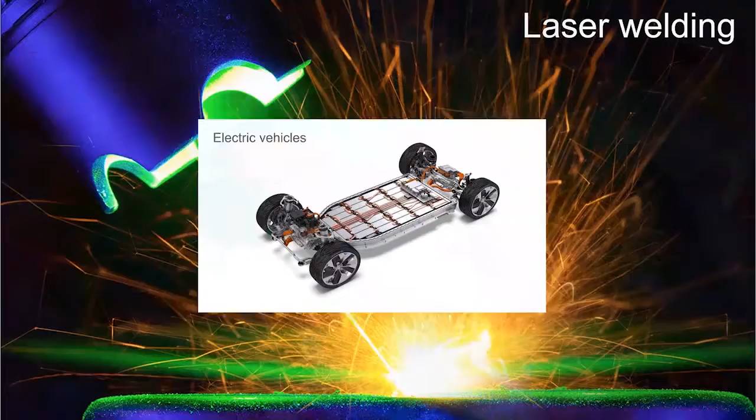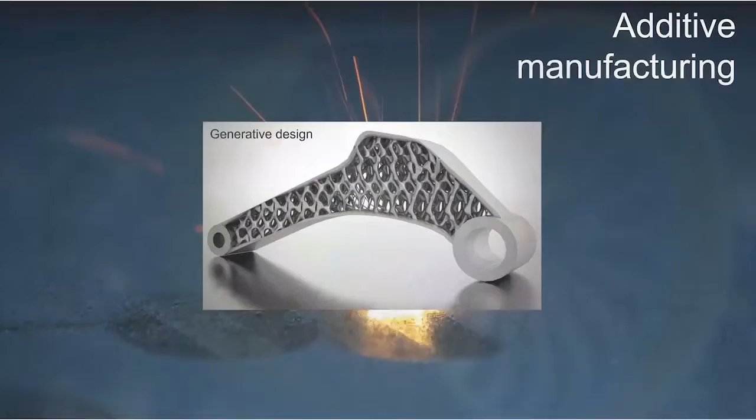Hi, my name is Rob Martinson, CTO at nLIGHT. On behalf of our global engineering team, it is with great pleasure that I introduce a remarkable breakthrough in laser technology. We call it Corona. Corona lifts one of the most fundamental limitations associated with lasers since their inception over 50 years ago: the ability to control a laser's brilliance with simplicity and speed from an all-fiber architecture.

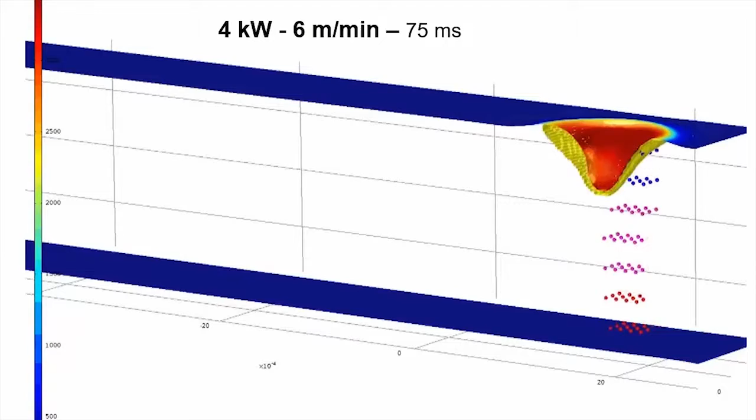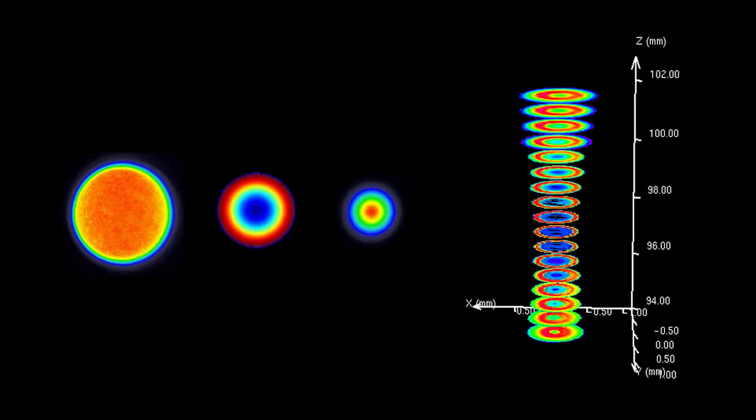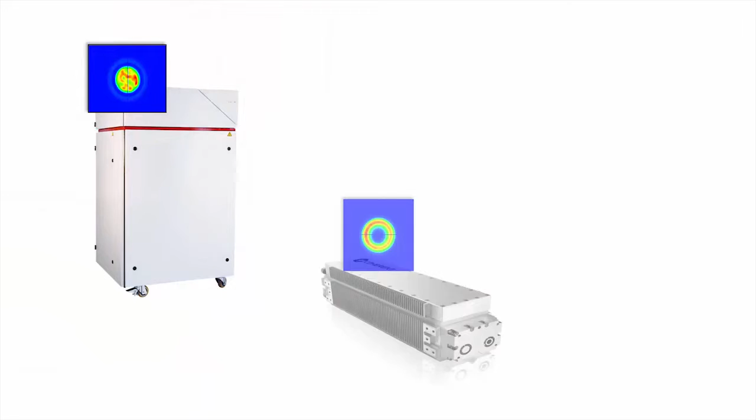Let me explain the significance of this. Choosing a laser for a particular application, whether it's for cutting, welding, or anything else, depends strongly on the beam characteristics. The size and shape of the spot, its rate of divergence, and its distribution of intensity are all very important. Changing the beam quality to address different applications required the purchase of multiple lasers or implementing very expensive accessories. These legacy approaches to variable beam quality introduce significant complexity and cost.

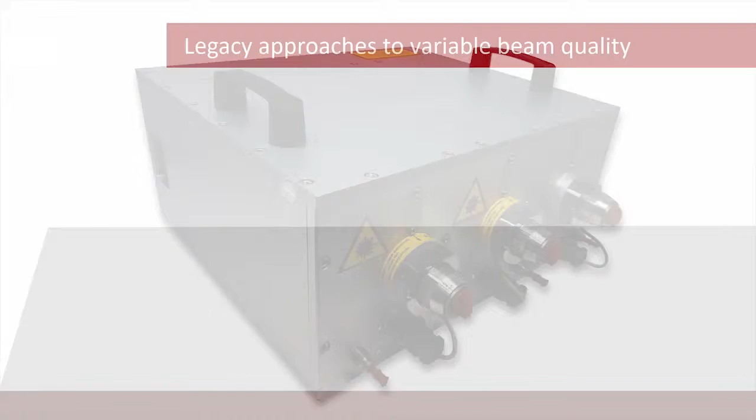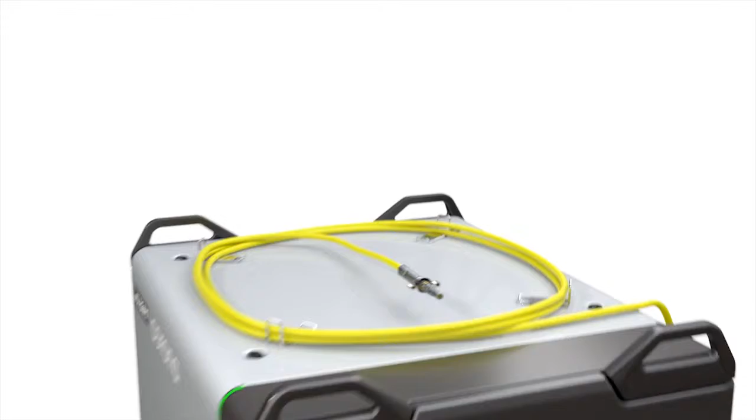In fact, we can identify numerous other issues responsible for limiting the acceptance of these legacy approaches to the industrial market. nLIGHT's new generation of industrial fiber lasers highlight the simplicity of Corona. Programmable brilliance from a single, small format fiber laser, enabling great versatility for machine tools and numerous degrees of freedom to dial in process recipes.

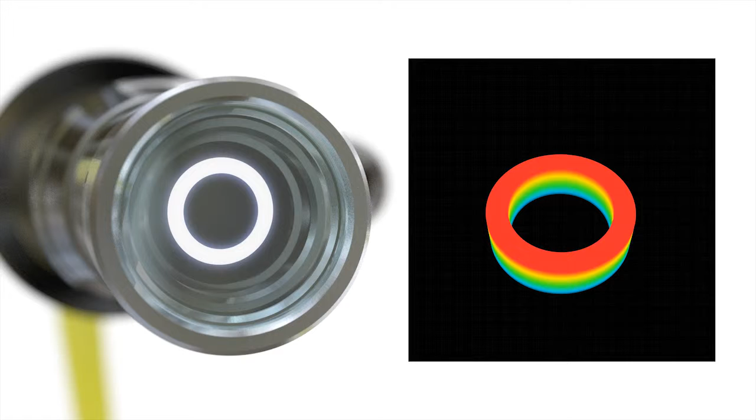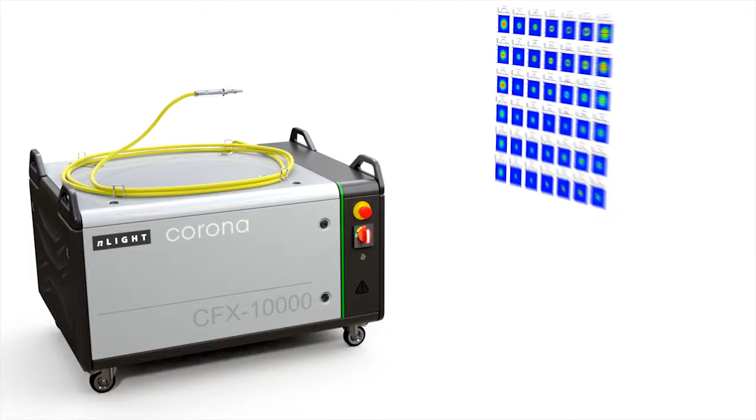Our customers are no longer limited to just a stationary beam profile. They can now switch between a broad palette of beam profiles and do it fast, meaning on the fly and in real time. And of course, implemented with elegant simplicity so it's easy to use and highly repeatable. Our customers can now be equipped with a powerful toolbox of spatially controlled brilliance that adapts to the specific operation they're performing and the particular type and thickness of metal they're working with. This idea of using software to make photons programmable is truly revolutionary.

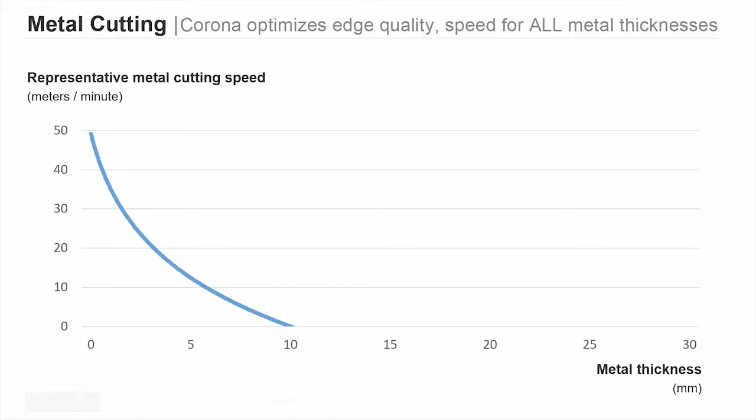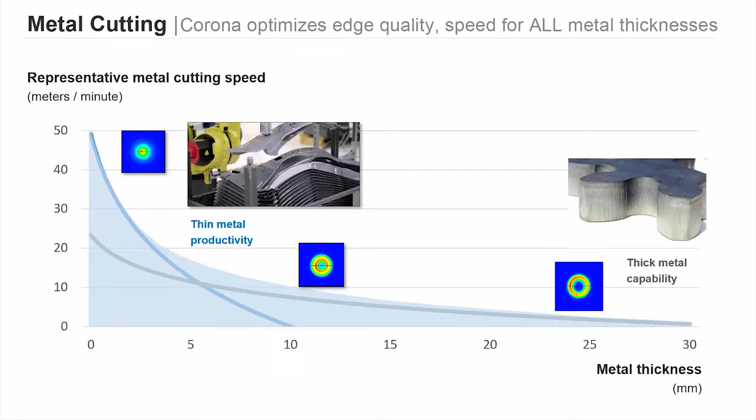Let me illustrate 3 examples of how this is benefiting our customers. For machine shops that cut metal, users have been forced to choose between buying a laser optimized for thin or thick metal. So what do they do? They have no choice but to buy multiple tools. Now, with the programmability of nLIGHT's Corona fiber laser, machine tool OEMs in essence have multiple lasers in one, enabling a single cutting tool to process thin to thick metal with the quality and productivity of several optimized laser tools. We expect this to save our customers and end users tens of thousands, if not hundreds of thousands of dollars.

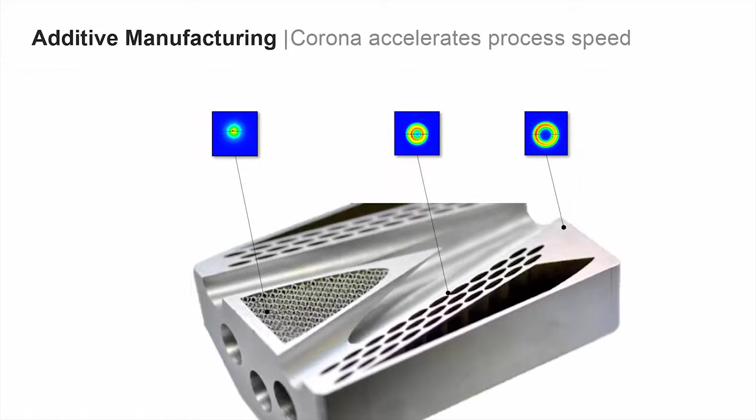The second example is for additive manufacturing. Here, the programmability is leveraged to deliver the optimal brilliance for printing fine scale, intermediate, and coarse features. Configuring the laser like this in real time and on the fly can save up to an order of magnitude in cycle time, dramatically reducing the cost of 3D printed parts.

Laser welding is a third example. The brilliance versatility of Corona can be applied to high-speed switching between shallow conduction welds and deep penetration keyhole welds from a single laser without an expensive beam switch. Spatter from the weld pool can be reduced, and the width of weld beads can vary on the fly to execute near-perfect joints, despite imperfections in fixturing, edge quality, and part-to-part tolerances.

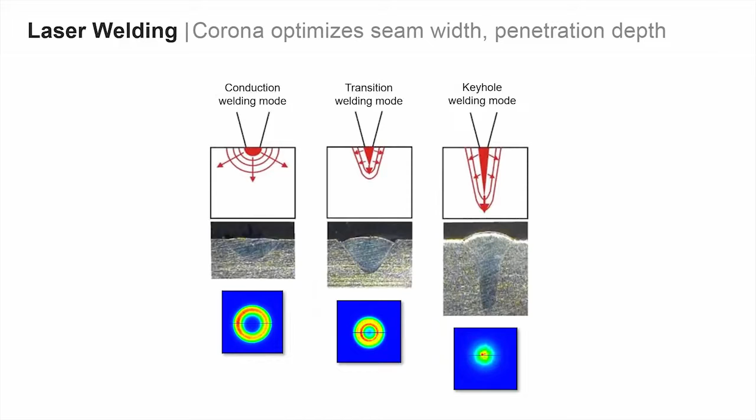We've engineered Corona to be powerful, reliable, and easy to use. Our engineers think it's cool technology, and our customers agree. I'd like to now hand off to Brian Victor, nLIGHT's Global Manager for Laser Applications. He'll speak to some of the finer points of how Corona is bringing distinct advantages to our customers doing laser cutting.

Typically, fabricators use multiple laser cutting tools to optimize performance for different metal thicknesses. A small fiber for cutting thin sheet, a larger fiber for cutting thick plate, or you can change out a focus lens and sacrifice productivity.

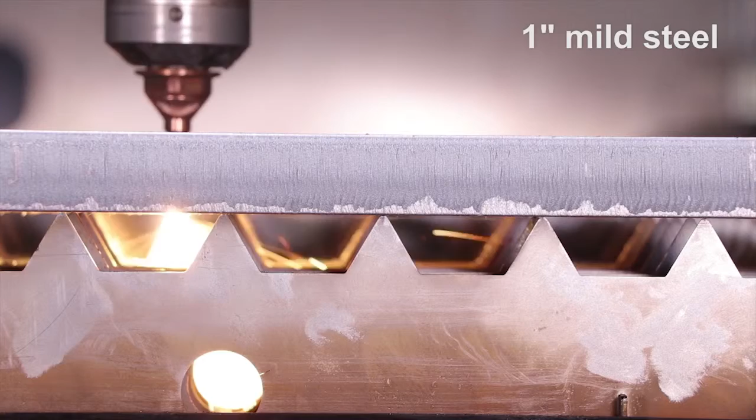Corona offers this same flexibility by changing the beam characteristics inside of the laser. With the same laser, we enable high-speed cutting on thin sheet and excellent edge quality on thick plate, like this 25mm mild steel. With the largest Corona beam diameters, cutting performance on thick mild steel is exceptional. With an optimized kerf and perpendicular edges, thick parts drop freely from the skeleton, making part removal easy. In fact, for oxygen cutting of thick mild steel, the edge quality with Corona is similar to CO2 laser results.

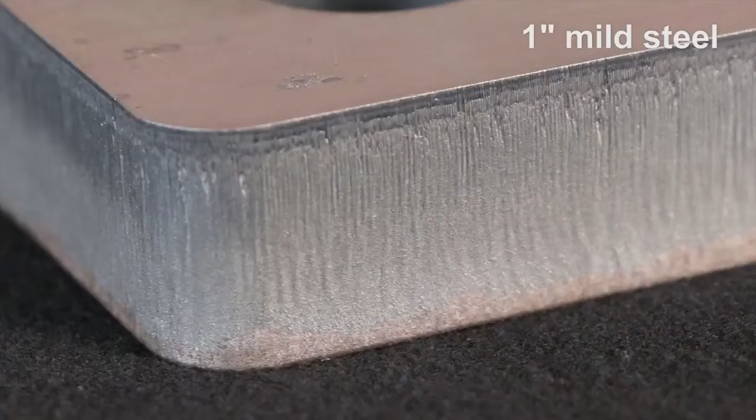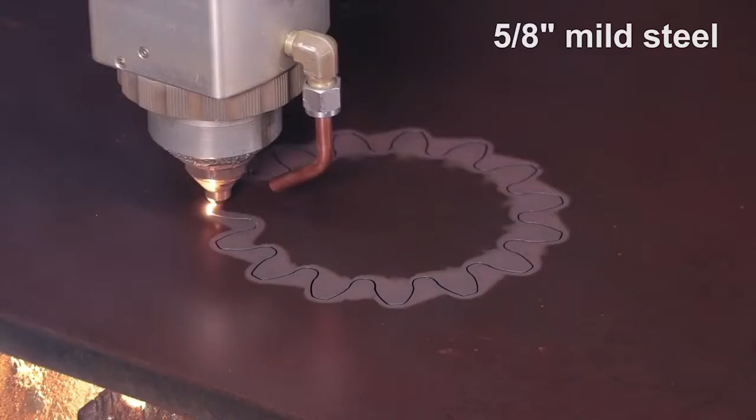On medium thicknesses, Corona offers small spot sizes for maximum speed, or intermediate spot sizes to produce wider kerfs. The wider kerf optimizes gas flow for improved edge quality and reduced dross. Corona incorporates the same back reflection protection embedded in all nLIGHT's fiber lasers, which is extremely valuable for cutting reflective metals like copper.

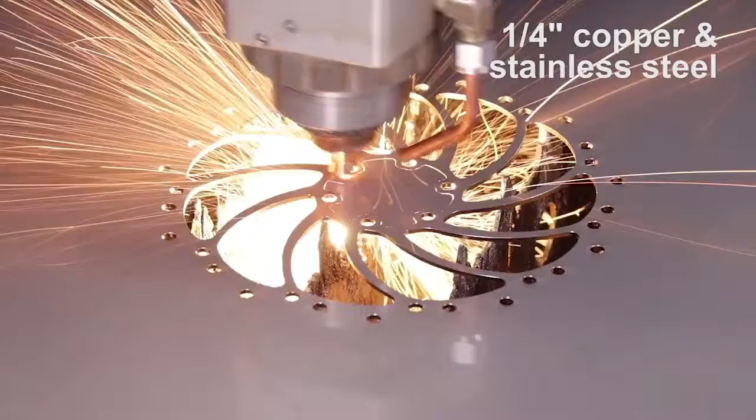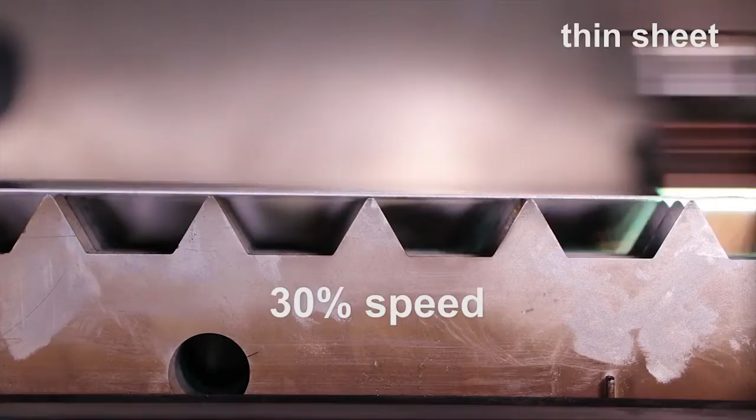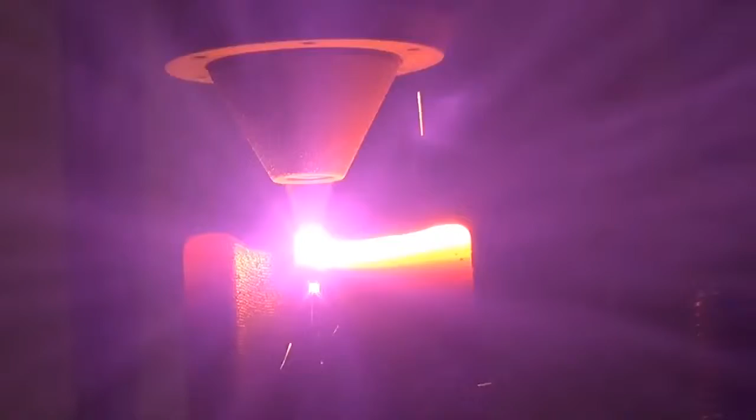For thin sheet cutting, the smallest beam size has the highest power density and the fastest nitrogen cutting speeds. Corona is capable of rapidly switching between different beam characteristics at full power to enable fast transitions from piercing to cutting on the fly. While these examples show the performance benefits of Corona for metal cutting, these same features also add powerful capability for welding, additive, and other industrial laser processes.

As you can see from these results, we're onto something that's pretty exciting. Corona, a new type of industrial laser where the brilliance can change on demand to optimize process results. It does this with the inherent reliability of an all-fiber architecture. Beautifully simple, durable, and easy to use.

As a laser engineer for most of my adult life, it seems we're entering into a new era of laser design. One where lasers become versatile, multifunctional tools that better meet the needs of the industrial market. Corona, with its programmable brilliance, makes it the laser for the fourth industrial revolution.